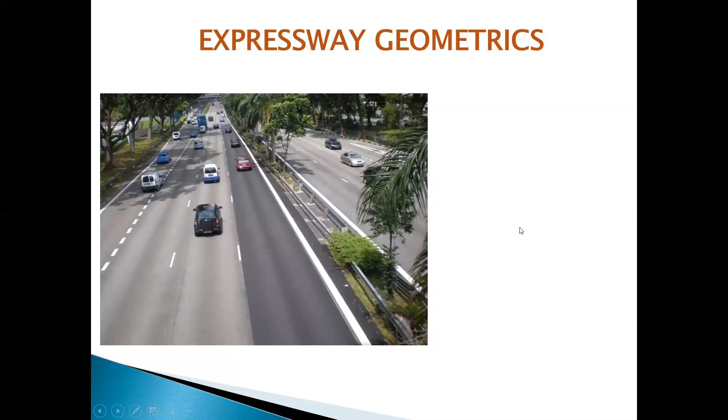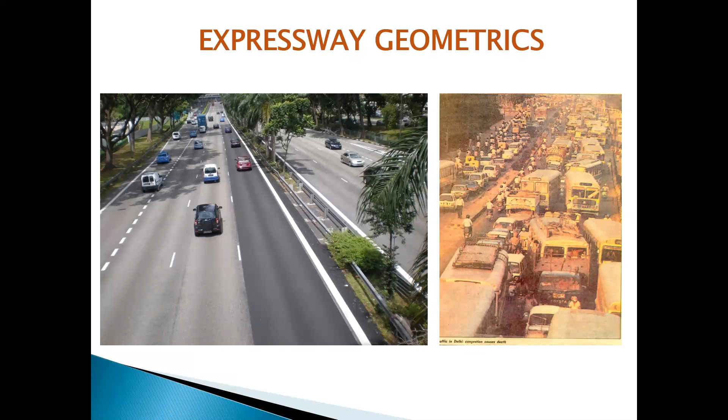If you see this photograph, it's an expressway, not in India. It's an 8-lane road, and you can see how the vehicle movement is taking place. At the same time, this is an Indian condition, not recently—it was the case in Delhi long time back, and you can see the mix of traffic which we have to handle, from a small vehicle like a cycle to a big vehicle like a bus or a truck, etc.

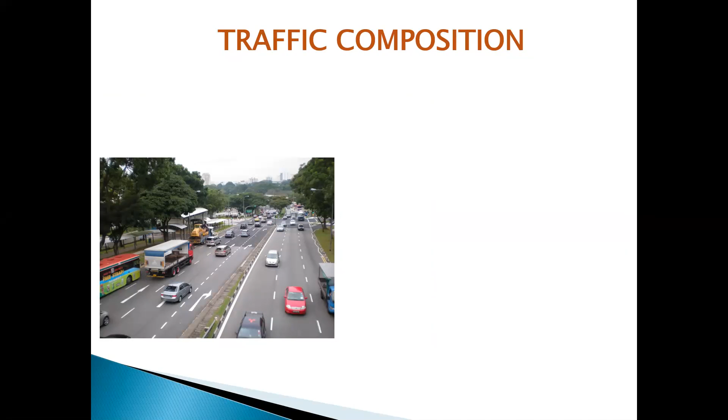It's again the composition of traffic. In developed countries or developing countries, in some cases you have only a limited number of categories of vehicles, maybe four-wheelers or buses or heavy vehicles, or very rarely the two-wheeler. But we should accept the fact that in Indian conditions, we may have to accommodate all these types of vehicles, including the bullock cart, in some urban areas, or even in rural areas you may have to consider.

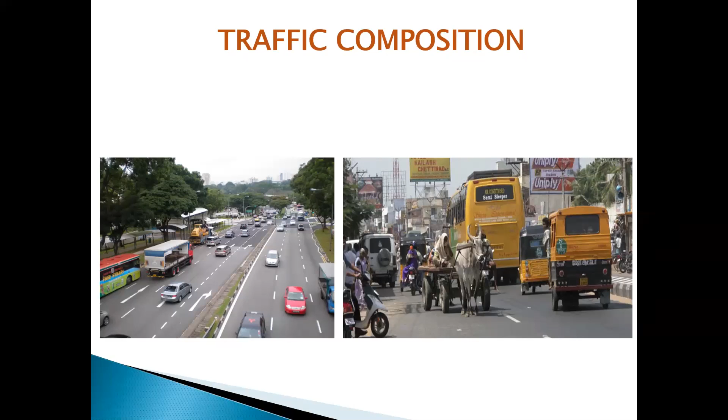Beyond that, if you look at how we should compare to a disciplined developed country, you can see how road users maintain their lane. In Indian conditions, this is the situation now, as shown in the right-hand side photo, and this even becomes a theory in such a way—how densely we can accommodate vehicles in a limited space.

So this is a best example, and this is probably you can see that one in urban centers.

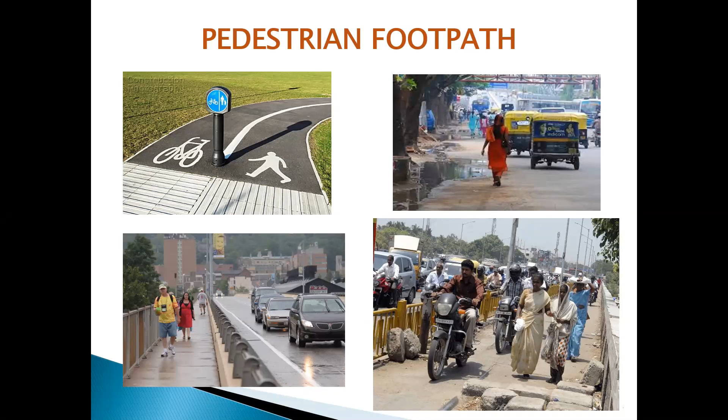You can compare the pedestrians and cyclists. They were given proper lanes, and nicely maintained pedestrian and cycle paths. But on the other side, even when we may have pedestrian facilities, sometimes pedestrians have to negotiate difficult pavement conditions, and sometimes two-wheelers also use that space.

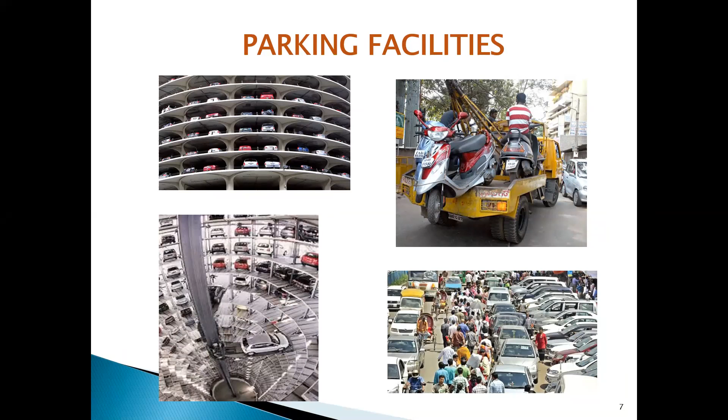Parking is a big issue in Indian urban or town centers, and vehicles are parked on the streets where these streets are meant for moving vehicles. When parked vehicles create issues, enforcement becomes a problem, or you may have to go for multi-story parking facilities as experienced in developed countries.

With all those things, the comparison is that we are a developing country, and economic conditions are increasing at a very fast pace, urbanization is a fact, and we expect more than 50% of the population in the near future will be staying in urban centers. We may have new cities, new urban centers, or new smart cities coming, with all these issues.

With urbanization or increased population in cities, traffic congestion is one difficulty Indian roads are facing, especially urban roads. The reason for that is there is not sufficient road development.

Of course, we might not have the space for road development, or the growing number of vehicles, especially with the COVID pandemic you can see individual vehicle numbers have increased on our streets.

You have low speed because of more vehicles on the street. Congestion is the issue, and that congestion forces speed to a lower level, and this congestion and speed restrictions may increase accidents and more fatalities you have to face. Then fuel consumption, increased pollution - all those things are issues.

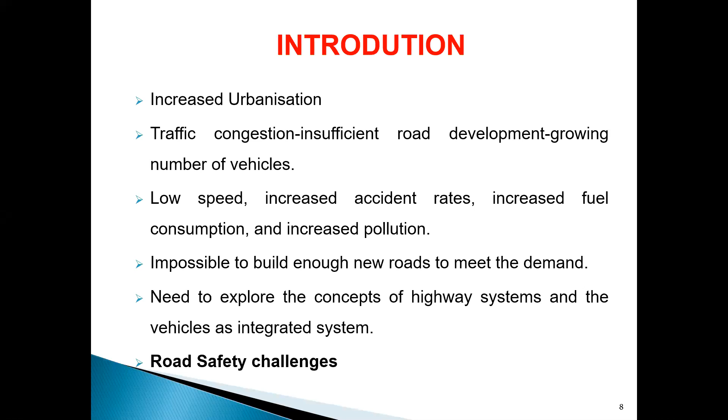It is a fact that it is not possible to build enough new roads to meet the demand. So we may have to explore the concept of smart highway systems, with vehicles as integrated systems of the highway. Today's topic, I want to give more emphasis to road safety challenges. So why is ITS required?

India is going through a period of drastic change in transportation. Transportation infrastructure is improving, the total length of the network is increasing, and vehicle population is also increasing. We should accept the fact that the economy is growing, and that too at a very rapid speed.

Insufficient and inadequate public transport system is an issue in Indian conditions. We are not in a position to provide sufficient, safe, efficient public transport system to the society, and because of that, vehicle ownership levels are increasing.

So one balancing management strategy we can try is to balance supply and demand - supply strategies and demand strategies, in which by considering existing supply, how demand can be reduced. That is our strategy.

Supply strategy involves development of new facilities like new roads or new transit lanes, or widening existing ones, but there is a limit for that in cities. You cannot widen the road beyond a certain limit, or you can add additional lanes to existing facilities, increase the capacity of public transit systems so that private vehicles can be reduced - moving people from private vehicles to public transport.

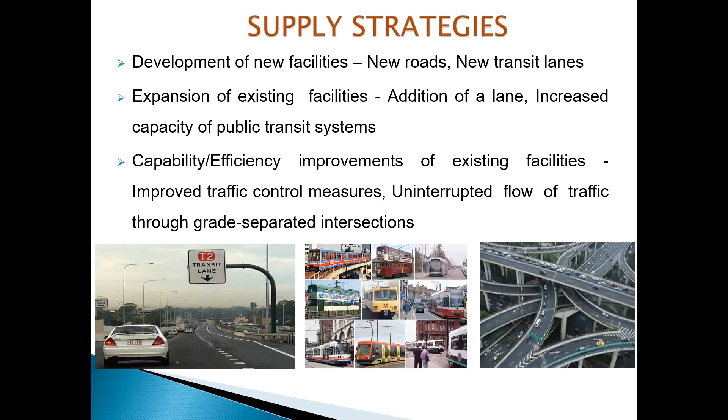The expansion can be only to a certain level. Beyond that, expansion is impossible. In that case, probably you can reduce the demand.

The strategies to reduce that demand include implementing road pricing. Suppose if you want to use the road, you have to pay. In that case, people will try to avoid using the road.

They will try to use the transport facilities, maybe the train or the metro or light rail transport systems, or sometimes the bus, etc. You increase the parking fees in the cities so that people will try to restrict the use of private vehicles.

You give incentives to carpools. Like 3 people going in 3 different cars individually can be pooled together to use a single vehicle, and you give some incentives for high occupancy vehicles or buses or similar public transport facilities, which you can improve by providing some incentives.

Then improvements in bicycle and pedestrian facilities, so that congestion is reduced - they can be given separate pedestrian facilities, separate bicycle facilities, so that the number of vehicle users on the road can be reduced.

Another demand strategy is to stagger working hours. Maybe the school can start a bit early, office hours can start later, schools can close early, or offices can work at different time periods.

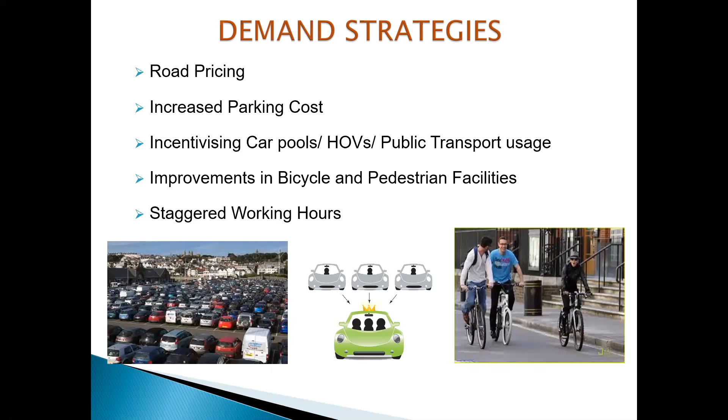These are the demand strategies, but in all those cases there is a limitation - beyond a certain limit you cannot do these things. So in that situation, probably the intelligent transportation system, short form ITS,

is the application of computer, electronics, communication technologies, and management strategies in an integrated manner to provide travel information so as to enhance the safety, reliability, and efficiency of the transportation system.

This is the conventional definition for ITS, in which you have terminologies like computer, electronics, communication technologies, management, then integration of all these things into a travel information system, finally looking to enhance the safety, reliability, and efficiency of the transportation system.

So in our National Urban Transport Policy, which was published in 2014, it encourages adoption of ITS technologies in the field of transportation to augment the facilities provided.

You would have noticed this in our smart cities - it was inaugurated in the Cochin area, and it is coming up in Trivandrum, and wherever smart cities are coming, this ITS became a part of that smart city, so that became a model and it can be extended to other cities also.

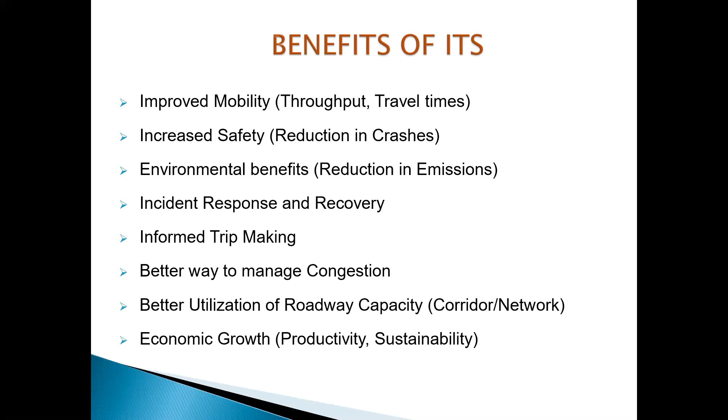And finally, all of the above benefits will lead to economic growth. In a way, the productivity and sustainability will be improved. So that is the benefits of ITS.

If you see the share of these benefits - accident cost savings will be the maximum. Definitely the time savings you are getting is the next one. So accident cost savings and time savings contribute the maximum share.

You can see that when fuel and emissions are reduced, the savings will be there. Operating costs will be reduced by an improved managed way, and government cost savings is also there. So you can see the savings in terms of accident cost savings and time savings.

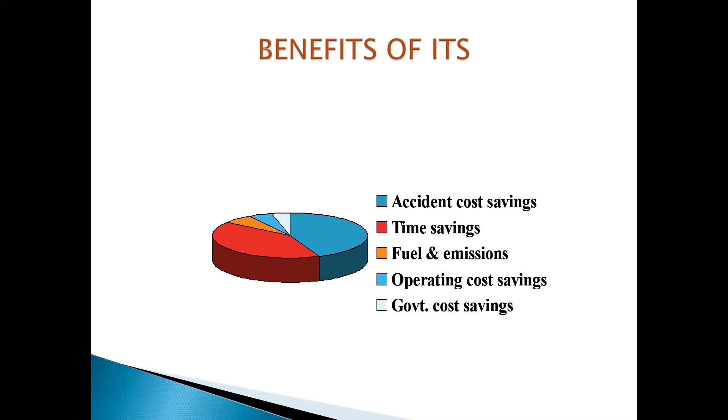So why ITS? It gives a systematic problem-solving approach, acknowledging the rapid changing travel behavior. You can see the travel behavior is changing, its pattern and its information impact.

The best example you can see is after COVID - the beginning, like lockdown and all, how the travel behavior changed and how the travel pattern changed, and what effect this will have on the travel demand and the road network.

Seek for faster, easier, better, and safer travel. That is the fundamental basic objective of the transportation system - it should provide fast, easy, better, and safe travel, whether it is passenger or goods. You have an opportunity for revolutionary and integrated rethinking of urban and regional transportation planning.

The ITS for road safety will be coming under advanced driver assistance system, advanced vehicle control and safety system, emergency management system, advanced traveller information system, intelligent speed adaptation, pedestrian detection and warning system, speed or red light violation detection system, ignition locking system like alcohol or non-helmet detection, seat belt or wrong side driving detection, and adaptive headlights. Maybe some of these things you would have experienced, and some ITS technologies are coming up while improving existing systems.

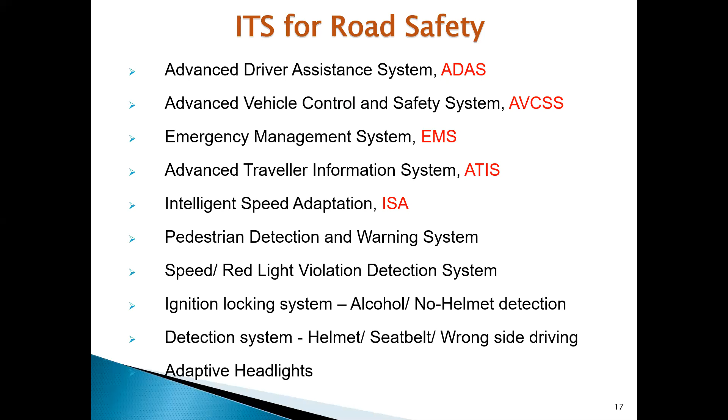So in a way, ITS has become a part of the common man's daily life. I will be sharing some examples of these technologies.

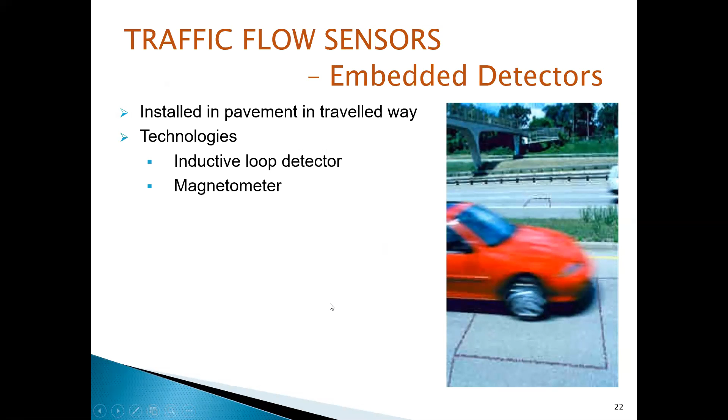You may require vehicle dimensions - that is, vehicle type, speed, lane occupancy, flow rate, etc. All these traffic related parameters you may have to collect, maybe through video image detectors or loop detectors or other methods. This is the best example of an inductive loop detector, through which you can get details of the vehicle type, speed, weight, etc.

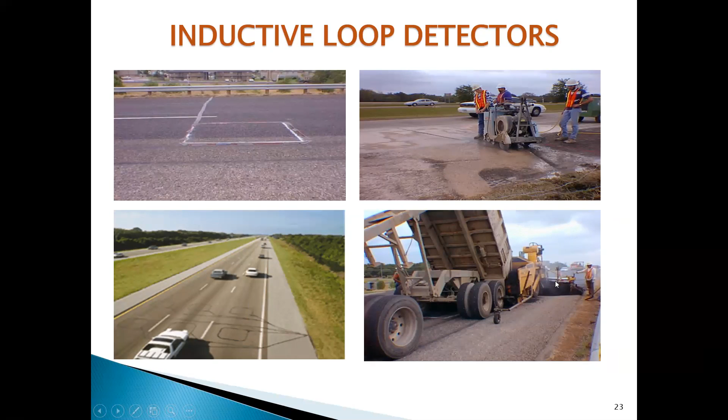This is a mechanism. Conventionally, we were following this approach, keeping detector loops on the highways or roadway, connected to a control system where data will be collected. You can see how that loop system is embedded - it's installed in the road system, with pavement layers above that.

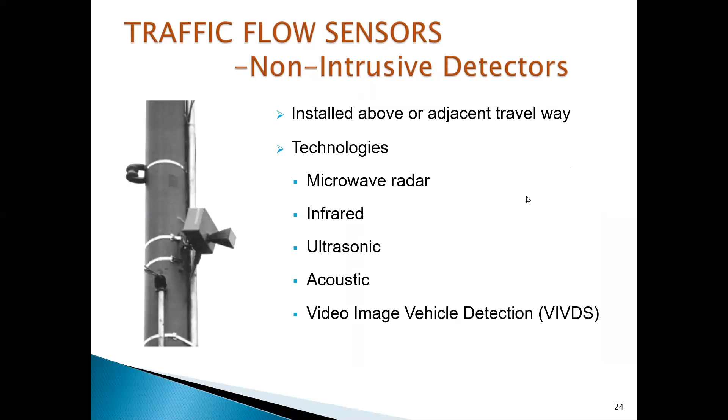It's also possible to get these details through other detectors installed above or adjacent to the travel way, using technologies like microwave radar, infrared, ultrasonic, acoustic, or video image vehicle detection. All those methods you can use to get the data.

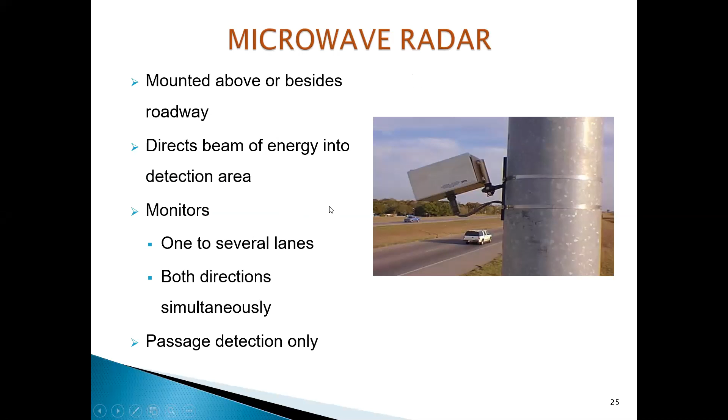Sometimes you can use collection mechanisms that can be mounted above or to the side of the road, directing a beam of energy into the detection area, and monitoring both directions simultaneously or separately - this is the microwave radar system. You can even use infrared mechanisms as well.

Again, the basic concept in all these cases is to get an image or signal from these vehicles, so that the system can identify the type of vehicle, the speed, sometimes the weight, or other parameters including even driver behavior. So mounted overhead or to the side, as I said, you can do that, but it's susceptible to environmental conditions - that is one difficulty.

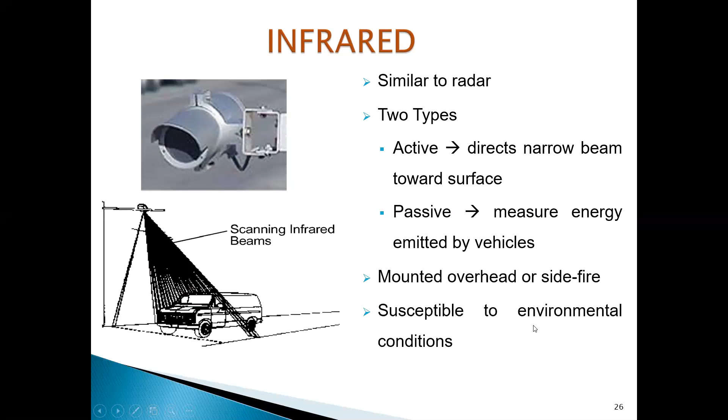Even sound signals can be used through acoustic technology, where a microphone and signal processing technology are used to listen for sounds and identify the source of the signal, the type of signal, and classification of the parameters you are looking for. So that is also possible.

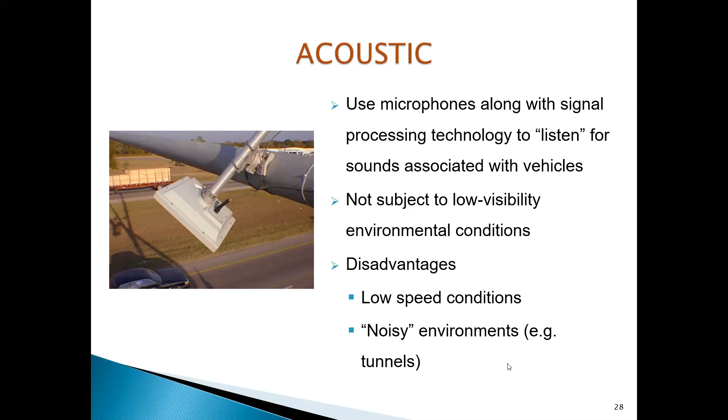Now this is very common - video-based vehicle detection systems. Even online facilities are available. It will be installed at an elevated place, and you can see the video image coming. Even the classified volume you can get, with almost 85 to 90% accuracy. You get this data, and it can be used for planning the transportation system. So the video-based vehicle monitoring system is also possible.

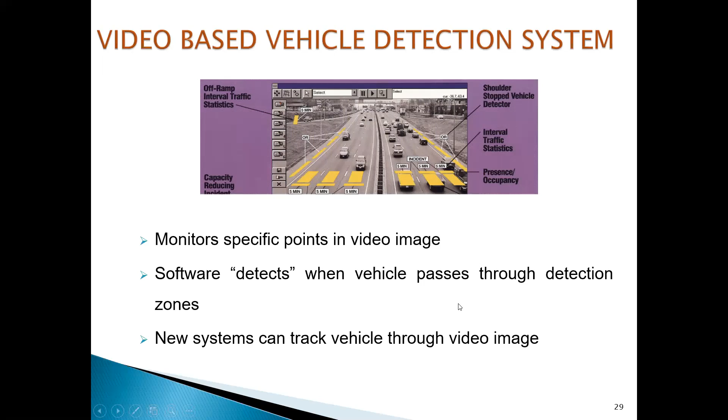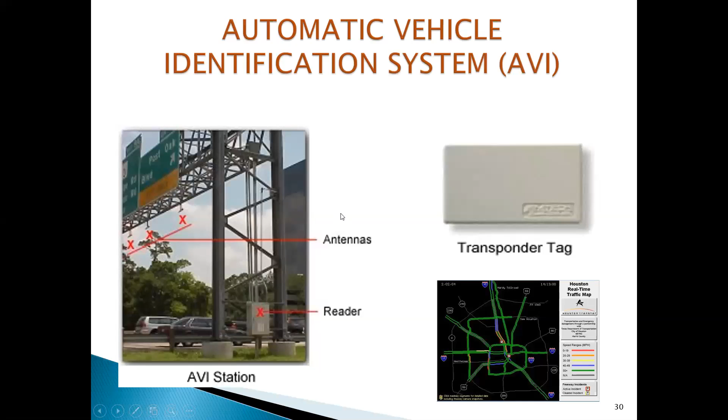Or you can even use the automatic vehicle identification system, the AVI system. Maybe gantry systems can be there, and antennas can be fixed there, connected to a reader, with a recording mechanism also there. And this is an important one - the automatic vehicle location system.

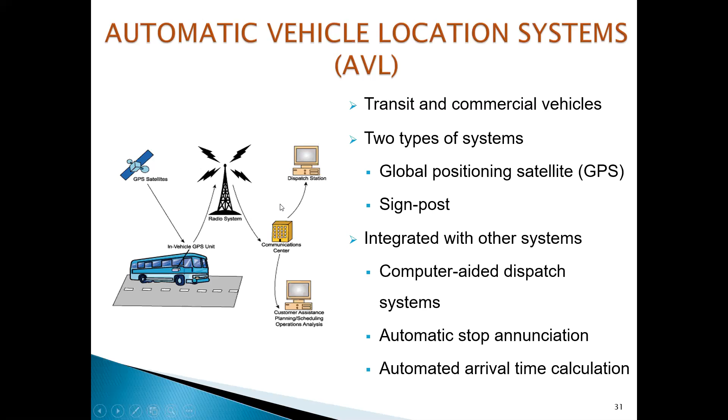Earlier, at locations, we were keeping equipment or instruments to collect the details. But now the concept has gone beyond that, such that all moving vehicles on the street system will be in a position to collect the data, or the position data from the vehicle itself will be communicated to the central system, and each vehicle's details will be analyzed automatically, and you can use that data for planning purposes. So the automatic vehicle location system may use GPS satellites, or a radio system, or roadside information systems are possible.

This was the very first concept we used at the beginning - the GPS-based vehicle tracking system - and now it is very common in almost all heavy vehicles, even in Kerala. The tracking systems are available, and that is how we were in a position to monitor or investigate.

For example, in the Avinashi accident, the authorities could get the details of the speed of the vehicle, where it was stopped, how much time it was stopped, and at which locations. All those things we could locate.

So GPS-based vehicle tracking systems are available, and data is communicated through a central system, through detectors, transferred to the transport center, using stationary or mobile communication media. And as all of you know, the cost of communication increases with the bandwidth.

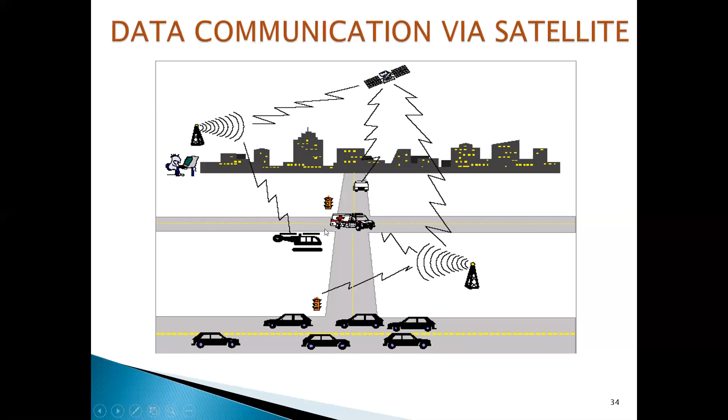This is giving a graphical representation of the data communication, the cellular system. You can see the towers, buildings, vehicles, and signal systems at the intersections, and all of these give you the data.

Finally, the data processing - you can collect the data, analyze it, record it, update it, including using latest technologies like decision support systems, or applications in artificial intelligence and machine learning systems. All this data can be used so that, in some cases, every second or every 5 seconds things will be updated, which can be used for communication purposes.

Finally, the information is conveyed to users through telephones, radios, televisions, and computers - mobile terminals like car radios, cellular phones, laptops, internet, car-mounted computers, pagers, etc. Through these different media or sources, you can disseminate this information to the users.

Coming to the ITS functional system, these are all conventional ITS information systems, in which the Advanced Traffic Management System (ATMS), Advanced Traveler Information System (ATIS), Commercial Vehicle Operations (CVO), Advanced Vehicle Control Systems, Advanced Public Transport Systems, and Advanced Rural Transportation Systems are there. All together, these come under the main umbrella or cover of Intelligent Transport Systems.

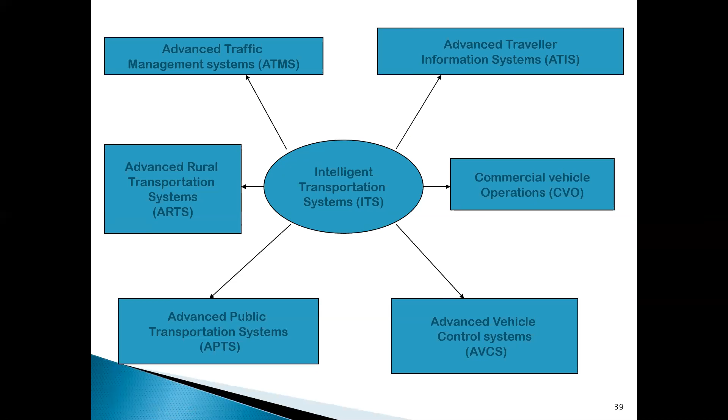And these sections have further subsections, and even developments are taking place. Now we'll be discussing some of the important or very popular applications.

And the traffic management details will be communicated online to road users, maybe bus passengers, car users, two-wheelers, or a person planning travel from one origin to one destination.

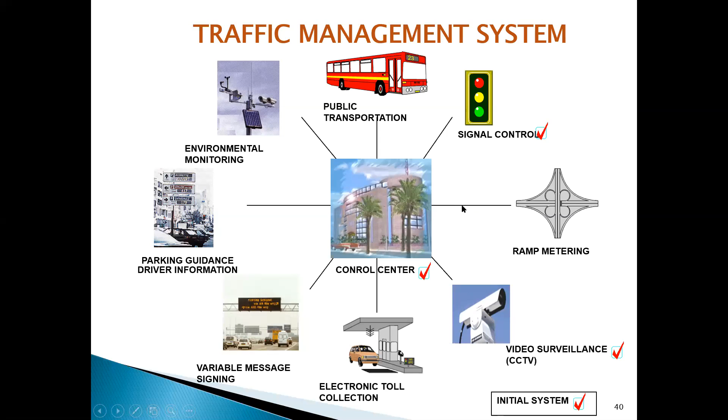What are the available modes? What is the congestion situation? What route can he select? What are the climate conditions? What is the possibility of parking his own vehicle? All these details you can get from the traffic management system.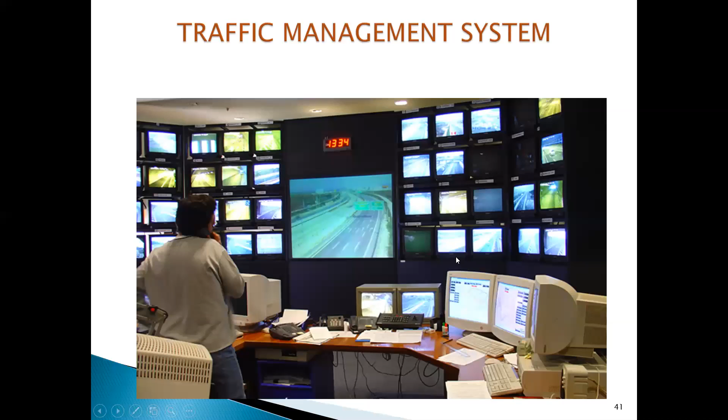There will be a centralized management system in which you can monitor the movements of traffic, or the efficiency of the traffic systems in the entire city, a sector, or a zone, from the center itself, using the traffic management system.

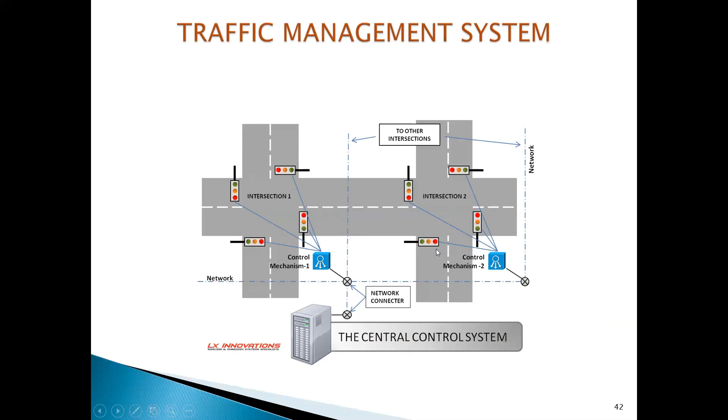Especially in the case of intersections, you can see signal control systems connected between signals. Area coverage or corridor management is possible, and this traffic management can be done even at the intersection level.

It is even possible to do parking management - the availability of parking slots - or you can book the parking for your requirement in advance, so that a slot will be available to the road user.

Another operational system is electronic payment, which has become very popular now in all sectors, including transportation. With electronic payment you reduce cash handling cost for transit operators, get more accurate data collection, and it is convenient for passengers, who don't need to carry extra change for fare payment.

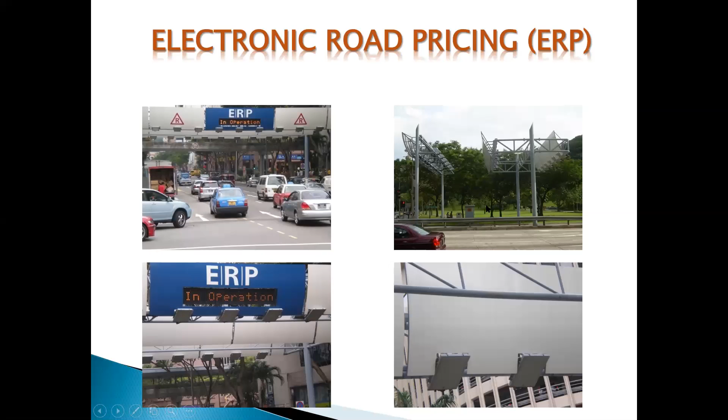These are examples of toll collection through electronic toll payment, electronic road pricing. This is the case in Singapore, where you can see in the first photo ERP in operation - when it's not in operation, a message will go out, and when ERP is active, the price will be automatically collected from the card, or you get the information directly through variable message signs.

VMS signs show reduce speed, construction ahead, or other options like accident, congestion, ice, snow, etc. This is informed to road users in advance, so that they can change their route or mode or time. All these things are possible.

Benefits of advanced travel information include reduced incoming phone calls seeking transit information, especially for public transport services, shorter phone calls, fewer drop calls, increased ridership from new and existing patrons, increased customer satisfaction, less email correspondence, and faster access to service information when researching a problem.

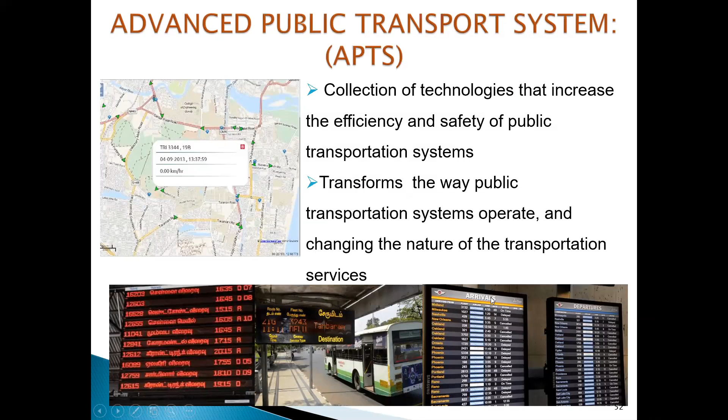The information comes even in a map, showing the destination, when the next vehicle is coming, the timetable, or the location of the current vehicle. You can expect this in India, in Kerala, in the near future, maybe in 3 to 4 months.

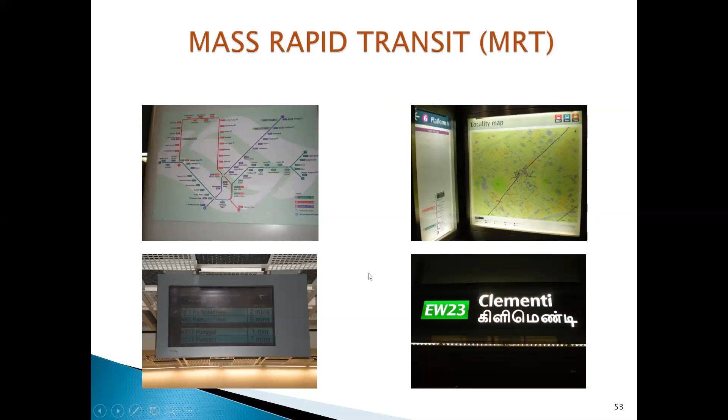The KSRTC is planning to have that tracking system and display that to the users, or the mass rapid transit system, where you have the metro or other facilities in which the network and even the timing for the next train. These are all very common nowadays.

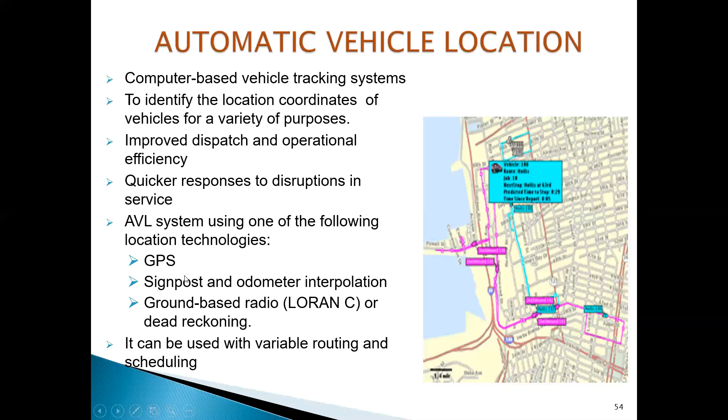In all metro networks, you have automatic vehicle location, as I already mentioned, in which you have a GPS, and those details will be sent to the main center location.

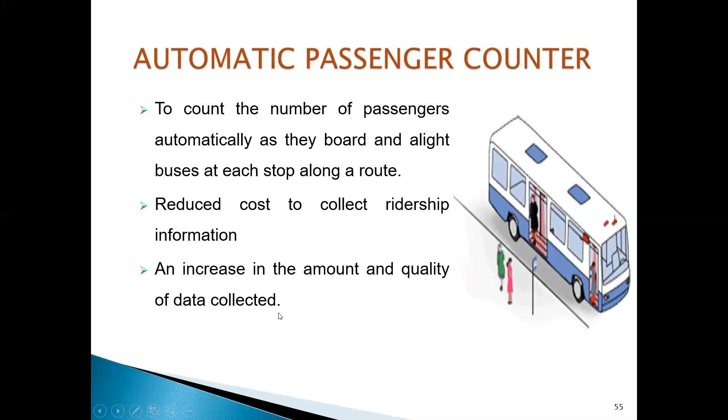You can even have the automatic passenger counter. Sometimes you may require ridership information. This is possible with a passenger count mechanism installed at the bus stop, so that however many passengers board, they will automatically count the boarding details of these passengers, increasing the amount and quality of the data collected.

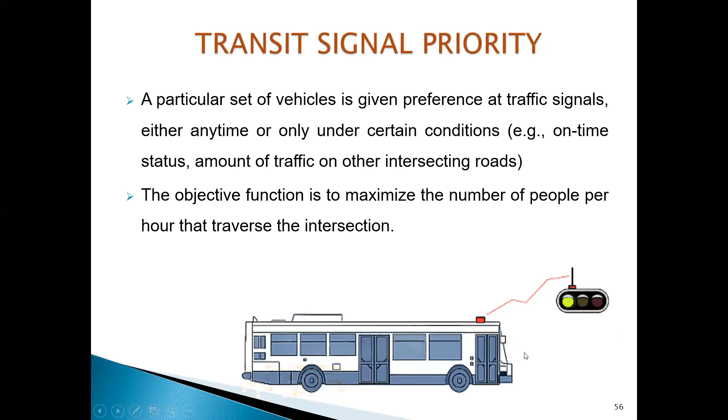Another area where you can have this ITS application is transit signal priority. When a bus is approaching an intersection, that bus will get green signal priority, so that the travel time of a bus will be less than that of a private vehicle, like a car or a two-wheeler. With this bus priority or transit signal priority, it will be easy to cross the intersection without any delay. This is applicable even in the case of emergency vehicles, which we are using now.

Then there's the smart card based fare system. You need not use cash, you need not give exact change, and so on. You can use your smart card, which can be shared, and used to pay fare. The advantage is you can use it for multi-modal systems, which is becoming a reality, and we've introduced it in Kerala, even in Cochin, where the train, bus, auto rickshaws, taxis, water transport, everything is integrated together. You can use one unified card system for origin to destination travel, with only one fare.

Such smart card systems are used in Singapore, called EZ-Link. It can be used for the bus, the train, or even to make a photocopy, and it will be monitored.

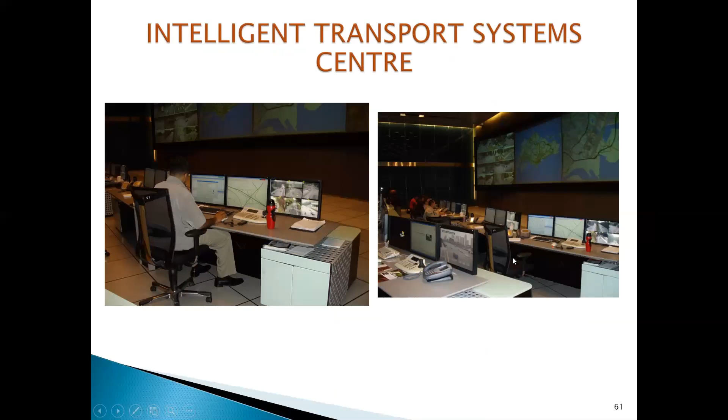The city traffic will be monitored at an intelligent transport system center. Onboard safety and security mechanisms and facilities are also available. Let me show some examples.

For example, incident response, which includes detection, assessment, response, evacuation, or communications, especially in centralized systems. When monitoring, if all of a sudden in a heavy traffic corridor the traffic stops flowing, you can expect that some incident has happened, and it can be assessed or detected even while sitting at a centralized place. Accordingly, the evacuation or response activities can be carried out, and it can be communicated to other road users.

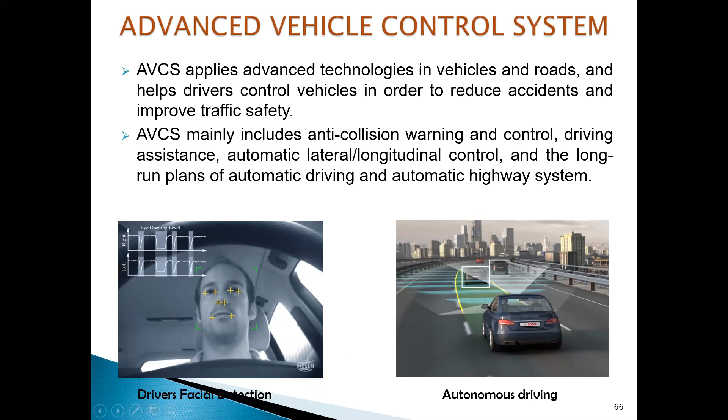Automatic driving, automated cars are coming now, and maybe they will be available for road users.

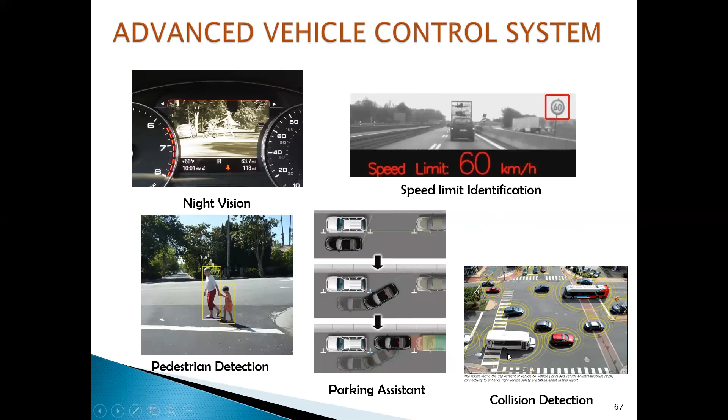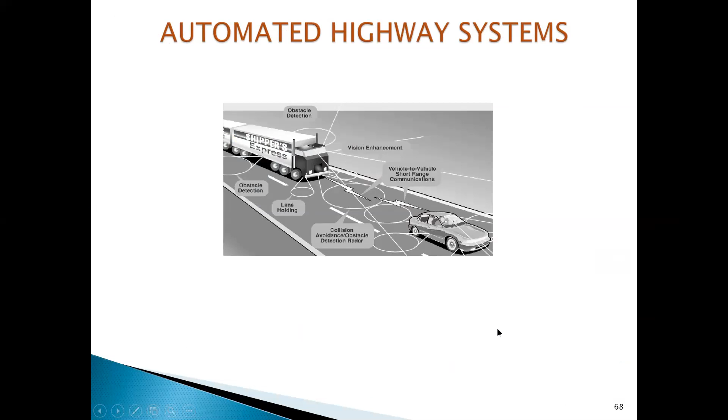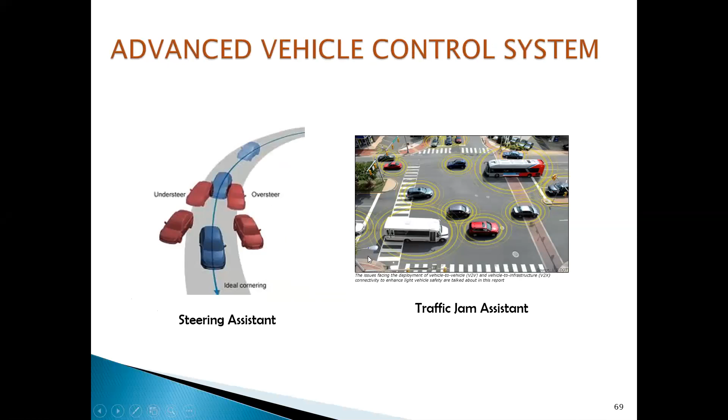These are all advanced vehicle safety systems, like blind spot detection system, lane departure warning system which I have shown you, enhanced visibility especially in night time or poor visibility conditions, rear view camera, reverse backup sensors, automatic braking, forward collision avoidance system, which I have shown you, side view assist and similar examples.

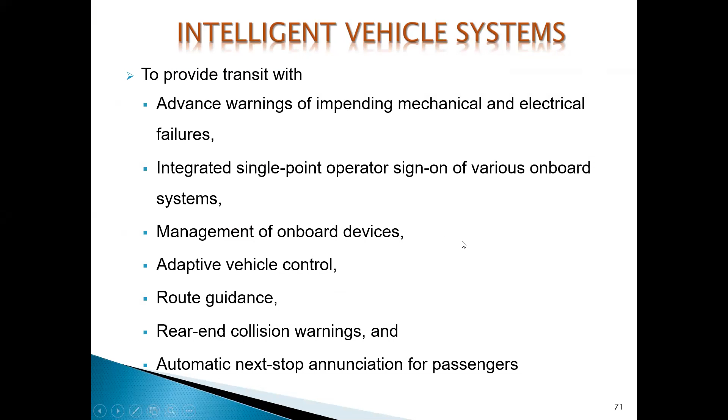You have a lot of applications in transit systems, advanced warning of impending mechanical and electrical failures, integrated single point operator sign-on of various onboard systems, management of onboard devices, maybe the petrol, the air condition of the tire. All those things are possible.

This I have seen, alcohol interlocks. Recently I visited Taiwan and saw that one. All the taxi drivers have the system in which the taxi driver can switch on his vehicle only after checking the presence of alcohol. So this is a lock system in which alcohol detection is possible, so that safety can be improved.

Other technologies to support safe driving are smart license car key, alcohol interlocks, drowsiness alerting systems, seat belt reminder system, personal navigation devices, intelligent speed adaptation, point-to-point speed enforcement, variable speed limit signs, driver workload management, enhanced night vision, illuminated road studs, and protection for pedestrians and cyclists at crossings.

These are all possible safe driving systems, already implemented even in Indian conditions: collision warning system, lane and road departure warning system, vehicle activated warning system, track activated speed advice system. Like that, listener, you can have all those things.

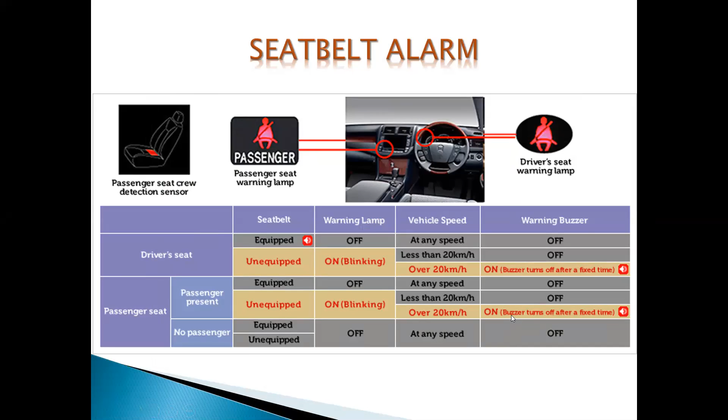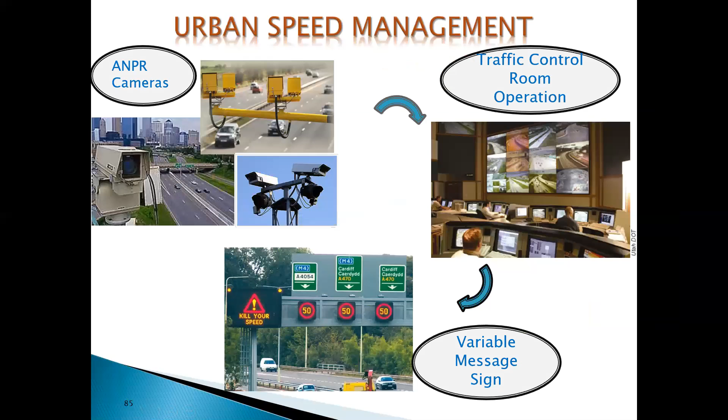And the ANPR cameras, all of you know, like automatic number plate reader systems, are available so this can be used for violation of speed or violation of the signal, and the information can be collected through the control system, and then through the VMS. This is the interconnected vehicle.

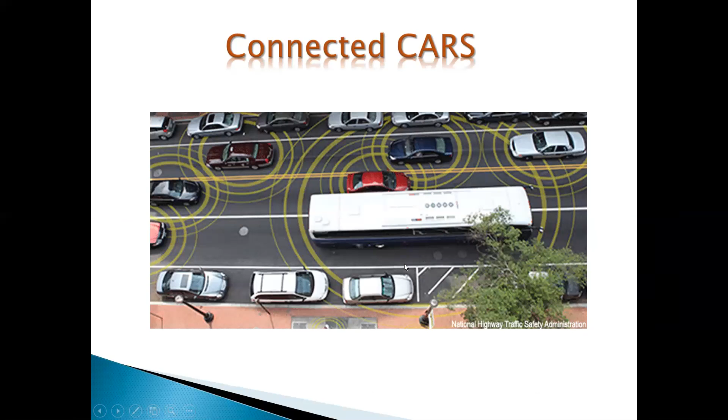The vehicles around you also will be connected through communication systems available in the vehicle, so connected cars will improve the safety of the vehicle. This is vehicle to vehicle or vehicle to infrastructure connected cars.

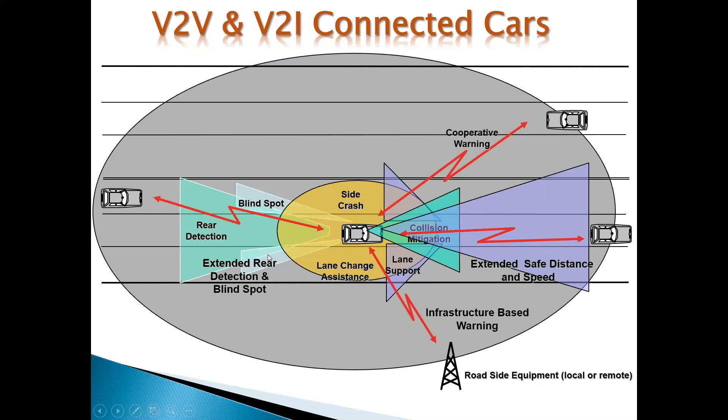You can see the vehicle is moving, and the safe distance or extended safe distance, then details will be connected to the vehicle, or the roadside equipment, or infrastructure-based warning systems possible. Lane support is possible, whether he is deviating from the lane, or the collision, at that speed, what is the safe distance available in front of him, or rear detection or blind spot, etc. is also possible.

The conclusion is, I just wanted to mention that ITS is for sustainable transportation development, aiming at efficient, comfortable, economical, safe, pollution-free, and tension-free travel. So ITS is towards safer, quicker travel. Thank you.